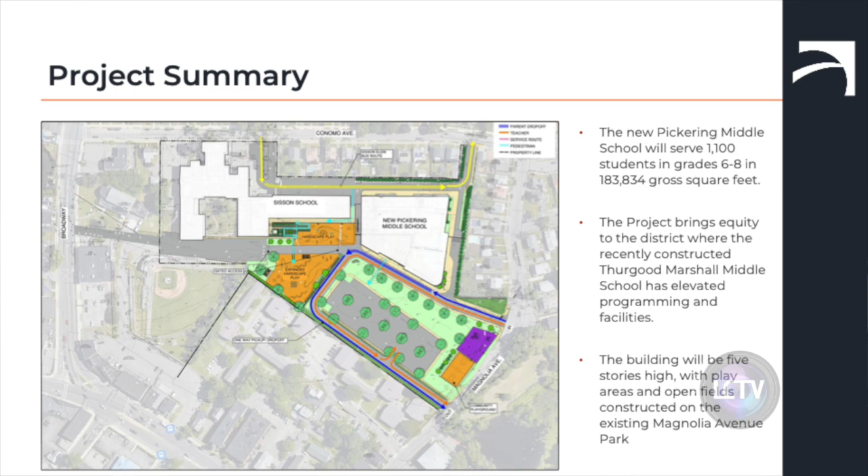So the new Pickering Middle School will serve 1,100 students in grades 6 through 8. It is a large building of 183,834 gross square feet. The project brings equity to the district, where we recently constructed the Thurgood Marshall Middle School, which has elevated school educational programming and facilities. This building will be 5 stories high, with play areas and open fields constructed on the Magnolia Avenue existing park.

In the past, in an effort to comply with the guidelines of the environmental justice policy of the Executive Office of Energy and Environmental Affairs, we set forth to conduct significant public outreach and community engagement. This began in July, and of course well before that of 2023, with the project website posted as part of the entire project from 2022 to 2026, if you're looking for ongoing information about the project.

In August, we sent out flyers and posters throughout town to promote the attendance of the first of two public forums, which we hosted here. If you were here, you will recognize some of these slides. In addition to that, we have been hosting and promoting the project on social media, in the newspaper, and via backpack mailer to try to reach as many members of the community as we can to talk about the project, bring in engagement, and bring in feedback.

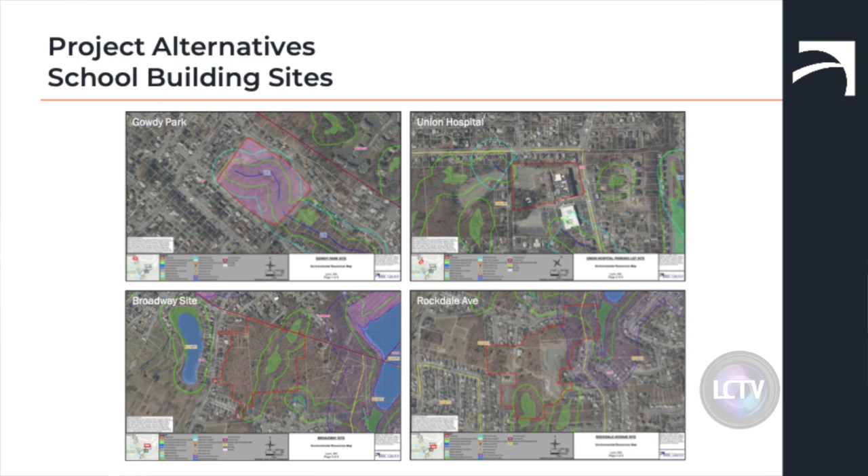For various reasons of constraint, ultimately the Magnolia Avenue Park, Sisson, and existing Pickering School site became the most viable and feasible site for the construction.

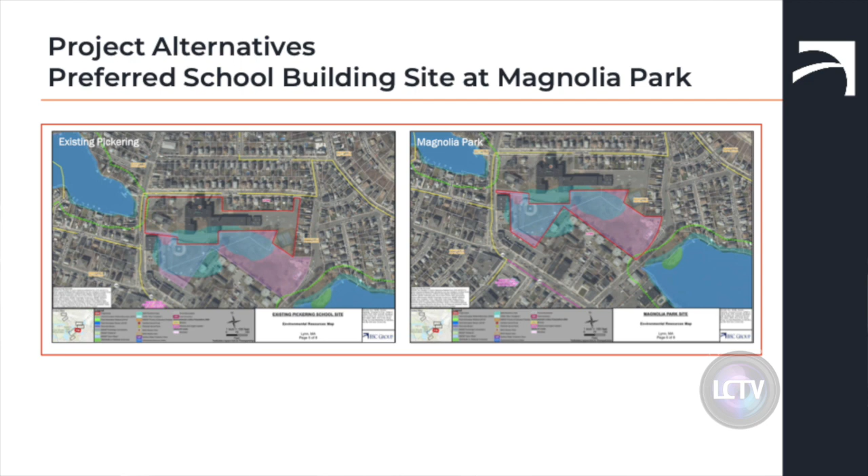Once we arrived at the settlement of working inside of this Magnolia Park site, we had to begin thinking about what some of the constraints are on this site, and what the actual parcels, the properties on which the school buildings are located, will look like in the end, and how we could divide the two.

So moving from that place, we had to think about how we would site the school itself on this existing set of parcels. We tried out multiple different fits, including actually moving the entire school down into the Magnolia Park area, or working with this existing Pickering School. But at the end of many different iterations, as you can see, we found that the most functional and highest use of this site and the programming we're trying to deliver is where it's located as part of the proposed project.

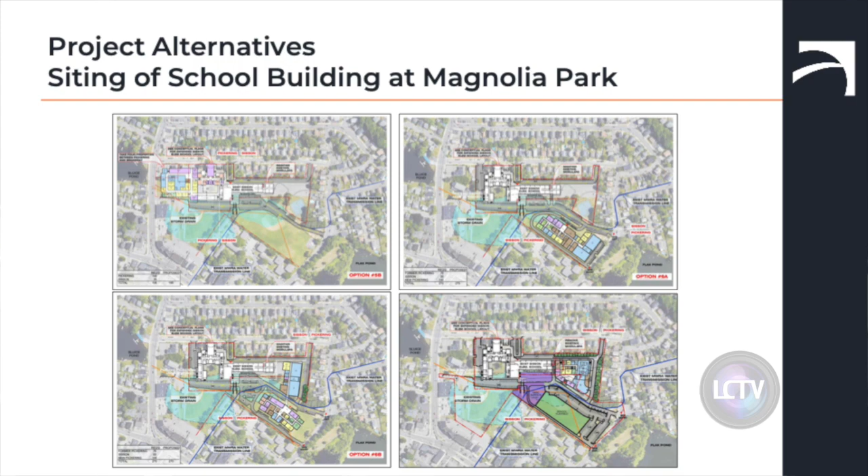So the proposed siting of the school is set on the parking lot and in the footprint of the existing modular classrooms that are attached to the Sisson School, and also in the tennis court area and somewhat down below. You can see the building itself, from the lower portion of the Magnolia Park area, has an elevation of 5 stories. From Conomo Ave, it has an elevation of around 3 stories. So it's multiple stories that are changing in elevation over the course of the shift down towards the park.

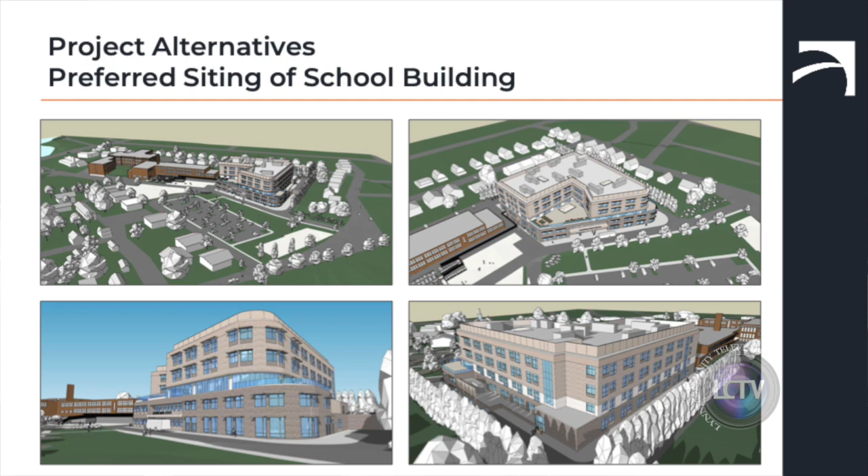As it is now, there are very few trees on the site. We will be planting more trees than we are losing, by a wide margin, and I'm really looking forward to restoring the park aspect of the Magnolia Park where we can.

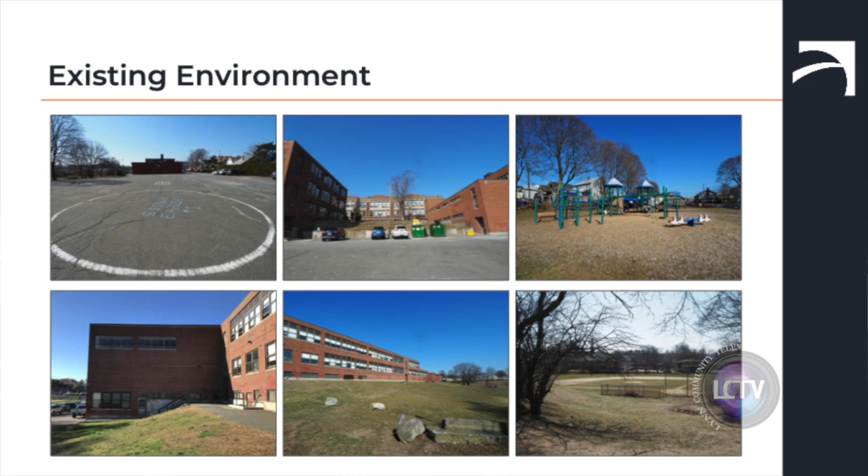So this proposed project exceeds the Massachusetts Environmental Policy Act, also known as MEPA, review thresholds in 3 different places. The first is with regard to land and land use. Magnolia Park enjoys a limited protection under something called Article 97, which is a statute of the Commonwealth that calls for protected parkland.

It is possible to relieve a parcel, to lift that protection, only in the circumstances that you are able to provide 2-to-1 replacement and 1-for-1 in-kind replacement: 2-to-1 replacement of the acreage of land, and 1-for-1 replacement of in-kind facilities.

Now, I know you can do 1-to-1 acreage replacement, but I've never seen that go over easily.

This particular project has some space of land to protect, so we've gone above and beyond in our transfer to make sure we're returning more mitigation and positive environmental impact as part of this disposition process than is actually expected.

The second MEPA review threshold is wetlands, waterways, and tidelands, specifically related to the ponding of water you can see outside today in the Magnolia Parkland area. That water basin is considered a flood zone A, an inland pooling of water where water pools, with no flow connected to it at this time.

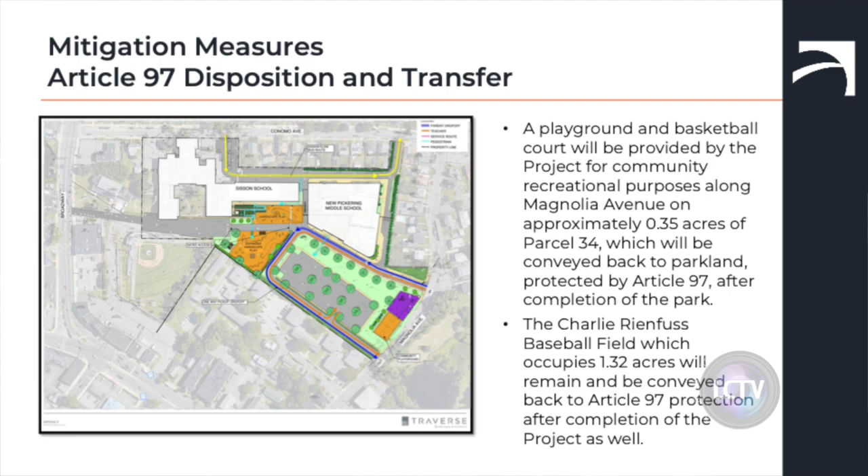So we're holding on to a park in the front for the public, and we're also making sure that we are separating the rest of the school project enough so that we're able to contain it if there is ever a need. In addition, that park is likely also to be transferred back into the Article 97 protection after it has been constructed.

The baseball field, as I mentioned, occupying 1.32 acres of parcel 5, will be relieved of the Article 97 protection for a temporary period of time, and then it will be reassigned to that.

So when identifying a replacement parcel, the Division of Conservation Services and the Executive Office really like to see a parcel that is nearby. As much as possible, if you can try to retain the green space within the community that you're taking it away from, you're doing the best that you can to try to compensate for that loss.

So in this case, we identified the replacement parcel on the unprotected Breeds Reservoir site, which was also a school building site within the feasibility phase. We are protecting a significant portion of that parcel in an effort to provide the one-for-one mitigation and return some ecological value to this part of the community.

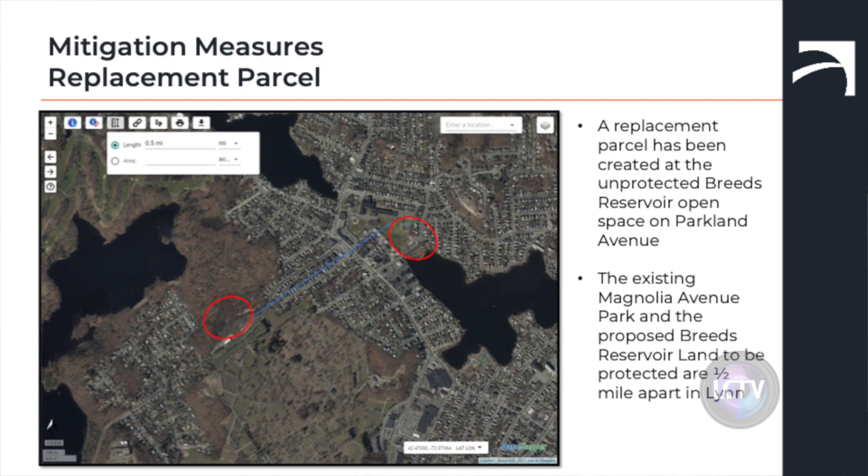The existing Magnolia Avenue Park and the Breeds Reservoir land, also on the frontage of Parkland Avenue, are about a half mile apart. There were no viable sites in the existing Pickering area that were large enough for that 1-to-1 ratio of conveyed to replacement land. This was really the only option that we had to look for.

So we calculated exactly what acreage we needed to remove, the net removal from Article 97, which was 3.15 acres of Magnolia Park parcels, and they're going to be replaced by 7.334 acres of transfers, what we're calling swap land on the Parkland Avenue site.

One of the most important considerations was to find a site that was geographically located nearby. We were able to do that, and we were also able to protect undeveloped land. There is an existing salt shed run by the DPW on the site that will be removed and restored on that portion of the site, but the dog park is going to be remaining.

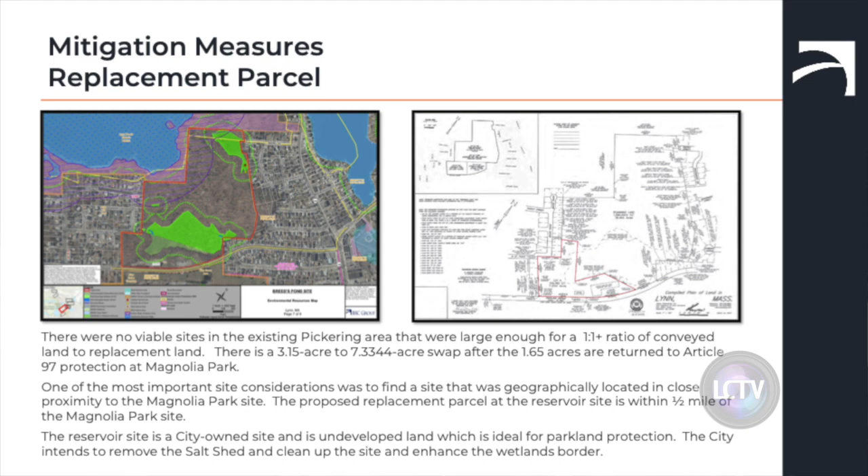On the matter of wetlands, waterways, and tidelands, as I mentioned, we are all aware that there is a certain amount of pooling water in that park. It exists in what's called the FEMA 100-year floodplain Zone A, an inland flood area where it does not have an assigned elevation.

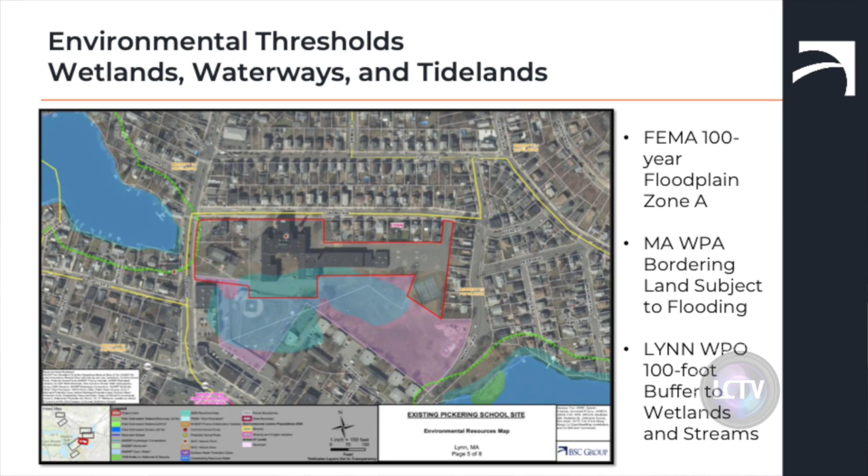We went through great extremes to make sure we could find the elevation for that entire parkland area. It's relatively flat with very small increments of change before you hit a hillside. But we had to define every single inch of it so that we were able to make sure that when we do move the area around, we're capturing all of the available flood storage that exists there now, and more.

So under the Wetlands Protection Act of the Commonwealth, this is a resource area that is protected called bordering land subject to flooding, and it does require what's called elevation for elevation compensatory flood storage. The design does perform to that standard, and the project was submitted as a notice of intent application to the Conservation Commission earlier this month.

It was assigned a DEP file number. We had a hearing. It was open and closed, and we are awaiting the issuance of the order of conditions. In addition, the City of Lynn, under their ordinance, has a 100-foot buffer zone to wetlands and streams.

So this shows exactly how we're going to achieve this compensatory flood storage. The existing conditions plan is probably a little bit small on the screen, but you can see that there is very little change in elevation on the plan itself.

However, we are in need of flood storage, and so these darker areas, the triangle and the other polygon to the right of it on the site, are actually going to be underground water storage containers that will be attached to a drainage system that eventually discharges downstream. It's all an existing system. We are going to be creating the underground storage capacity.

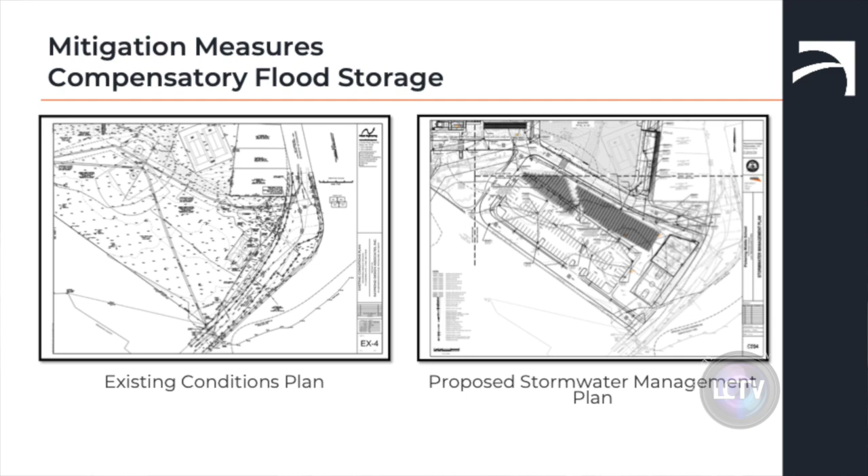On top of that will be green space. That is the retained green space in the park. There will be some trees planted there, but we won't be able to put too many because of the storage beneath it.

The next environmental threshold is the transportation threshold, the 2,000 average daily trips anticipated to come to the site. A traffic impact assessment was conducted, and we've been very careful about designing the traffic flow on the site to limit the options for arriving there. There is a singular entrance and exit off Magnolia Ave used to access the site, plus additional flow around the site for fire trucks, emergency vehicles, buses, and other uses if ever needed.

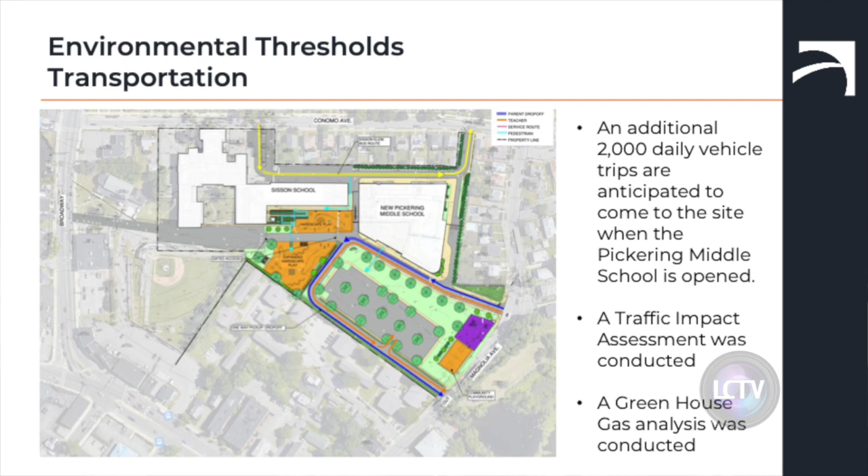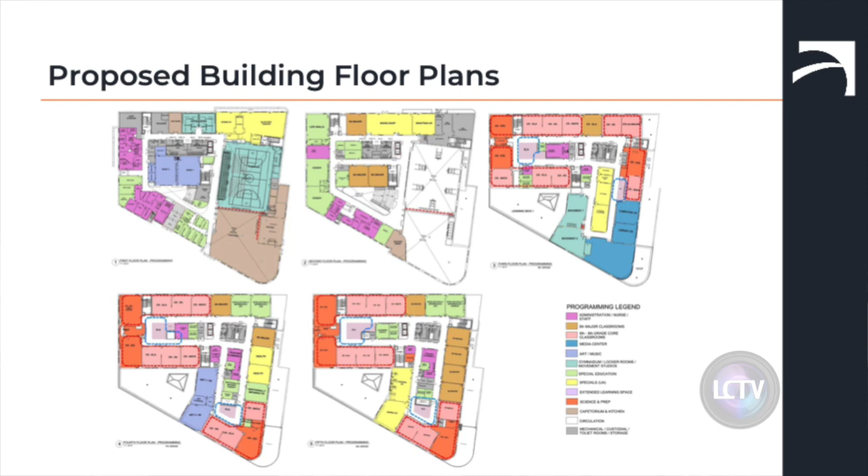The proposed building itself is a very compact floor plan. Every single square inch of it is going to be used. There's a lovely balcony on the front, and many of the classrooms have entirely south-facing windows, so it's going to be a very bright, open, airy feeling in that building, with the facing view of most of the school looking back down towards the park.

For impacts to the project site, the developed site will be cut and regraded to create the appropriate, consistent, and stable slope to support roadways, sidewalks, buildings, and the stormwater system. You're going to see significant site work out here, especially in the area of the tennis court and the existing backstop of the former diamond field that is no longer there. The project will convert a portion of the previously maintained lawn and recreational area into the development, including a retaining wall, roadways, sidewalks, and parking.

The project also requires the disposition of the Article 97 parcels, which is both a legislative act and a review act of the executive office happening in tandem.

Section 61, which I mentioned earlier, specifically asks projects of a certain size to consider climate change and its impacts as part of the project design. So we went through each threshold to make sure we were able to provide mitigation for each impact.

The first impact is the land impact, which is the Article 97 disposition of Magnolia Park. We're providing a 2-to-1 replacement of disposition land at Breed's Reservoir, and we'll also be providing significant facilities upgrades to what's existing there now.

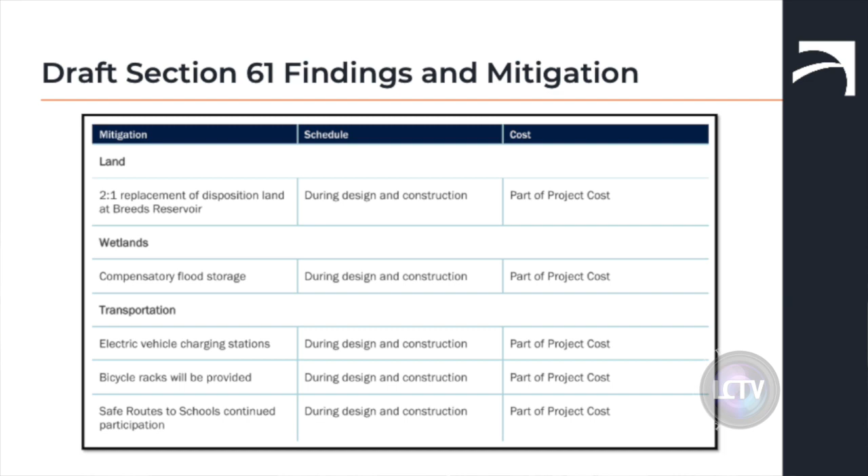So the next steps for this project are to complete the Article 97 disposition process and complete the MEPA review process. We are in the middle of MEPA review right now, and we are here to solicit public comments specifically, and also ask you to please provide written comment so that we can respond as we continue to review. We are aiming to complete estimating and establish the total project budget and schedule.

It is currently estimated to be approximately $170 million at the preferred schematic phase. We would also like to complete and submit the detailed design submission to MSBA, which the School Building Committee is here to talk about later on tonight.

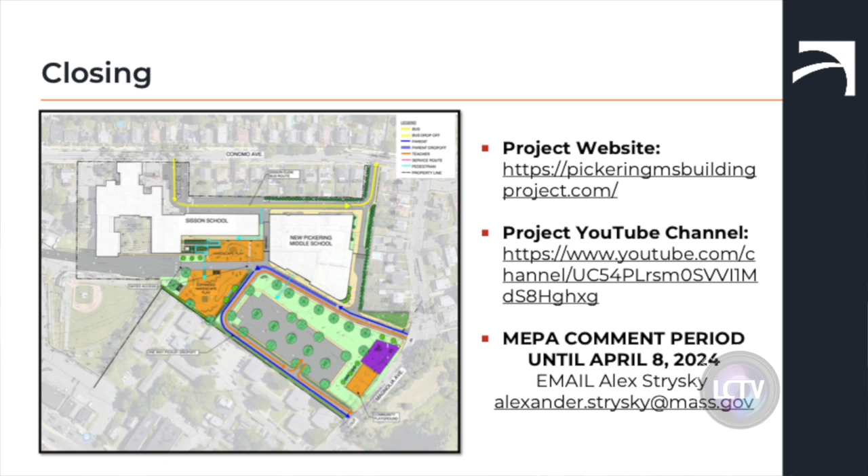Well, thank you, I'll kick us off. My name's Brian Lockyer. I live at 2 Rand Street here in Lynn. I'm a city councilor at large, and on the building committee. My comments tonight are more in line with my son who goes here, and my oldest son is a 10th grader at Classical, also attended Pickering.

Going back to 2016, as a parent I had dreams and aspirations for my children to be able to go to a new Pickering, which could have been open now. I was extremely disappointed by the community vote in 2017 that stopped that from occurring.

So although my son in grade 7 will never experience a new school, I know future generations of children are going to have that opportunity now from the fine work and groundwork that's been laid in a positive way, involving the community and our allies and supporters of public education. And make no mistake, it's very difficult to build new schools.

Our administration recognizes that, the community recognizes that. We could have had two new middle schools back in 2017. We could have fixed the generational bulge of the middle school 5 through 8 in this city, for the cost of this one, this Pickering now.